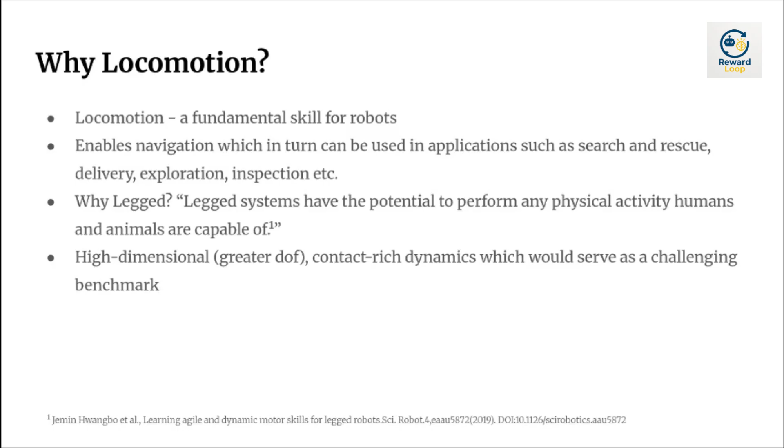One reason legged robots became famous is that they gave us an opportunity to explore and exploit applications where it is hard for tracked or wheeled mobile robots to go, similar to what we as humans and animals are capable of. Another reason is that the control of legged robots is much harder than wheeled robots, because you can reduce the contact dynamics of wheeled mobile robots into a very small number of points, whereas in legged locomotion you always have contact-rich dynamics. So trying to solve this with reinforcement learning also becomes one of the benchmarking tasks for reinforcement learning.

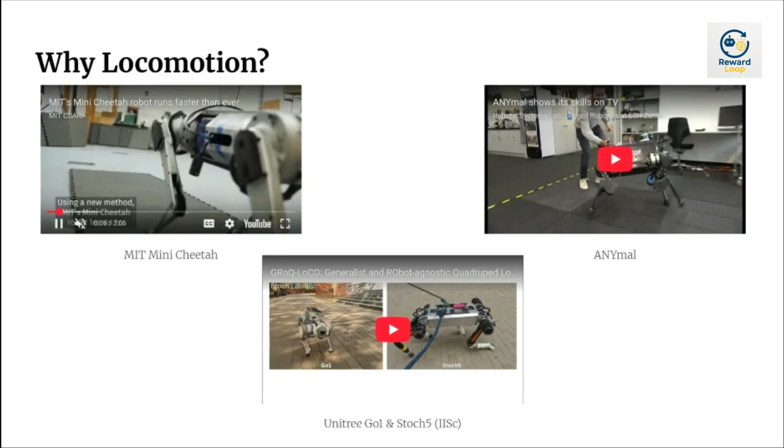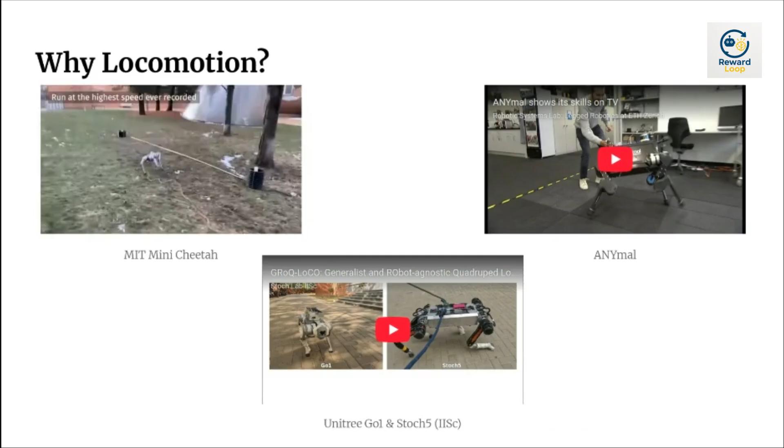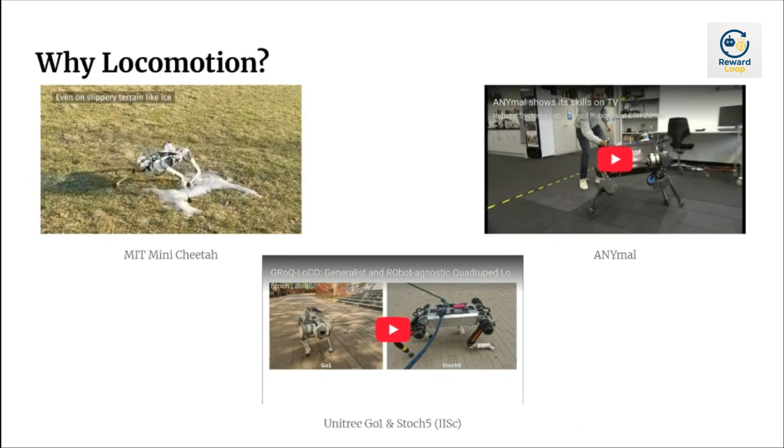I have gathered a few videos of famous legged robot progress. The first is MIT's Mini Cheetah, which everyone would have seen. This was one of the pivotal advancements in the legged robot research space. The video shows a reinforcement learning based training policy which enabled the cheetah to achieve velocities higher than what people were able to achieve with traditional controllers.

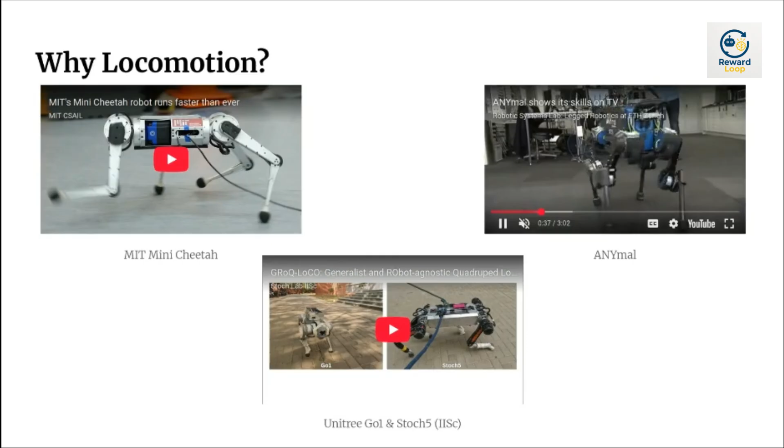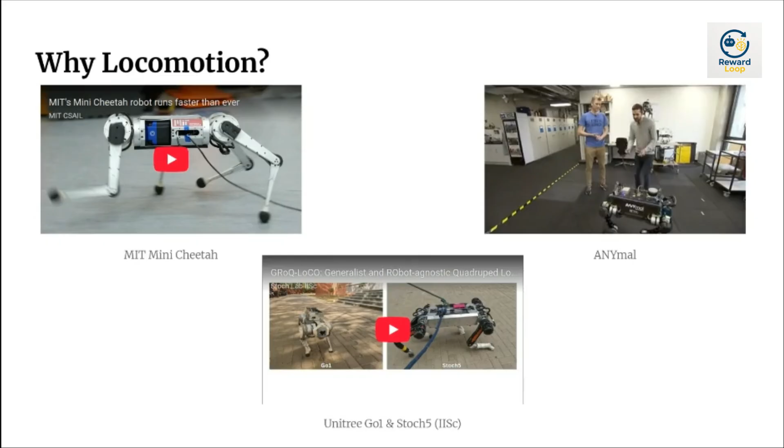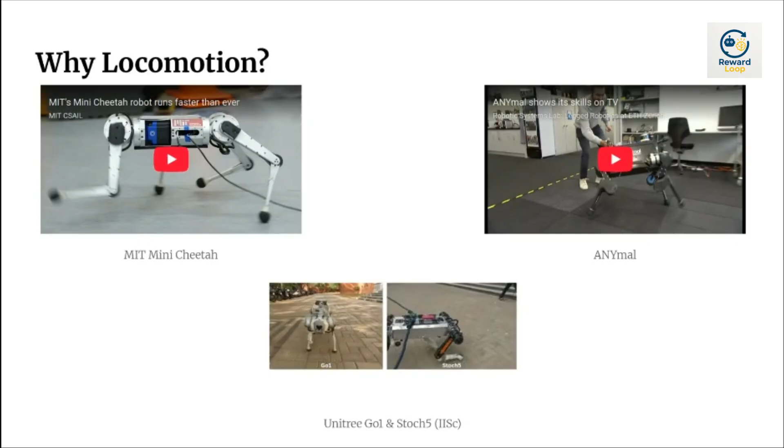The second video is from ETH Zurich, also a reinforcement learning based training policy on their own robot. One thing to observe is that the morphology of the robot is not exactly the same, but reinforcement learning was still good enough to learn it for that particular robot. The third video is from the Indian Institute of Science, Bengaluru — also a locomotion policy trained using reinforcement learning, demonstrated on two different quadrupeds.

Before going to reinforcement learning based approaches, first we have to know how legged robots were controlled earlier, because before going into RL, why do we have to go into RL if classical controls are good enough?

The research of legged robots is believed to have started with the great Professor Marc Raibert, who did a lot of research on legged robots and wrote a book called Legged Robots That Balance. He did research on the Hopper robot and tried to come up with template dynamics using the SLIP model and classic control theories.

Even though these classic control methods proved to be very good back in those days, the major issue was these were all hand designed and hand tuned. Every time you wanted this control to be running, you had to spend a good amount of time tuning the robot to make sure it is good enough to adapt to the current task. And of course, this hand tuning comes at a cost of generalization to new environments or new terrains.

Fundamentally, classic control always had a modular controller design approach. You can boil this down to two elements: the higher level element tries to plan what trajectory should be followed, and the lower level element in the classic control method executes how the trajectory should be followed. So it was basically two controllers trying to match each other's task.

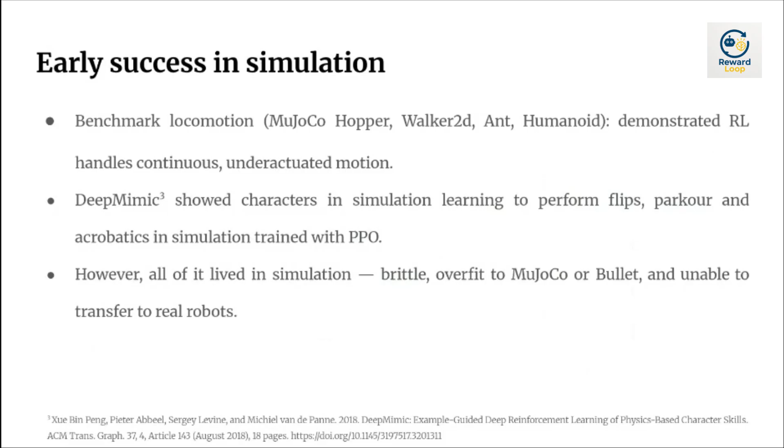And remember, this is only in simulation, we didn't shift to real robots yet. Probably one reason why we couldn't shift to real robots was because people started realizing that the algorithms might be trying to exploit the quirks in the simulation, like shortcuts, which might not be true in the real world.

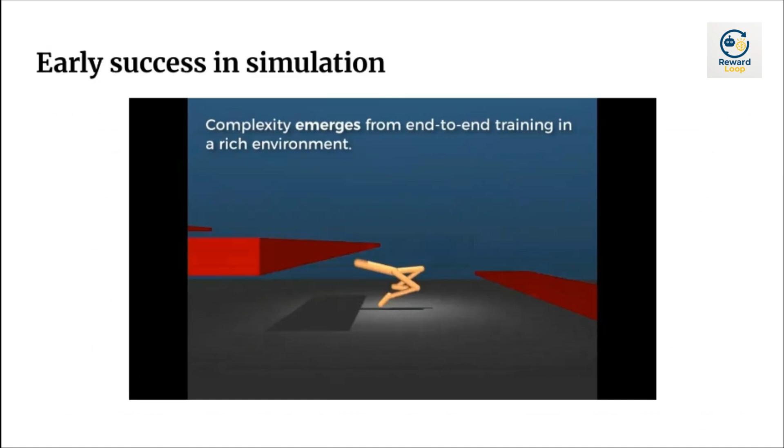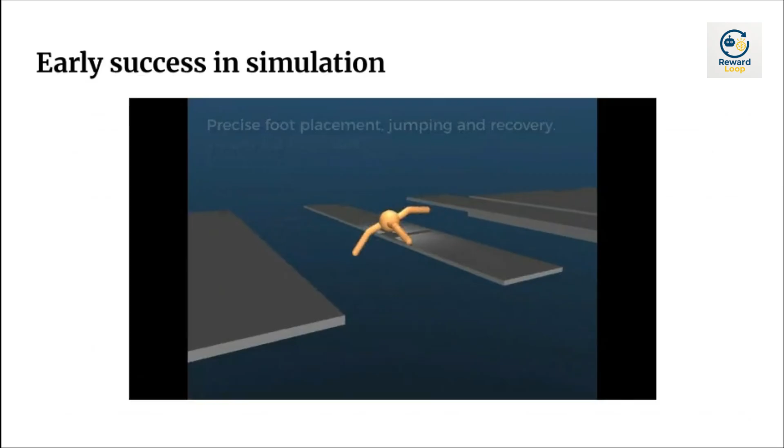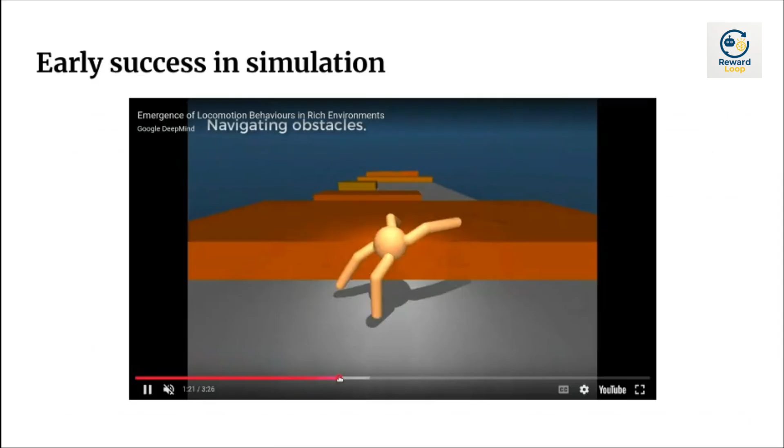This is one of the videos of DeepMind, where they showed that locomotion was successful in a 3D simulation environment. You can see here this is a very basic model of MuJoCo's whole quadruped. Notice that all the demonstrations shown in these videos do not show us any real robot. All these videos are very rough estimates of how humanoids and quadrupeds could be.

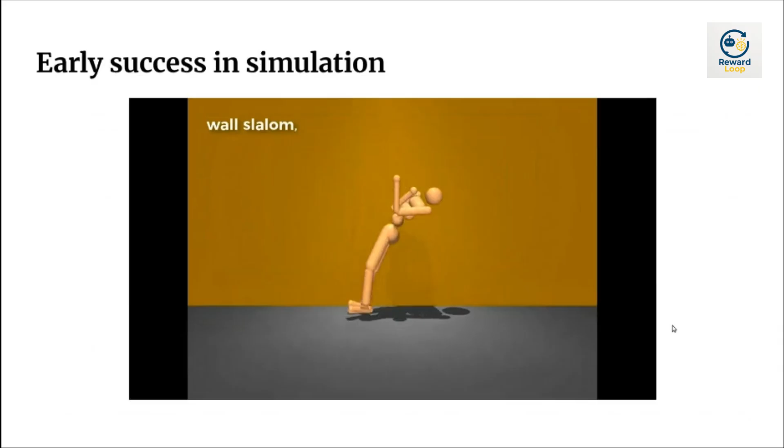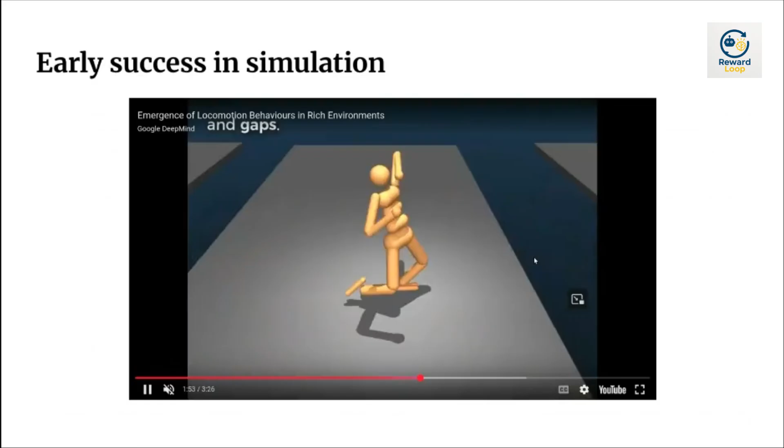And if you see what the policy came up with as walking, it might not seem natural. Hence this itself showed a clear statement that the policies that emerged from the simulation environment did solve the problem, but they were not good enough to be transferred to real life.

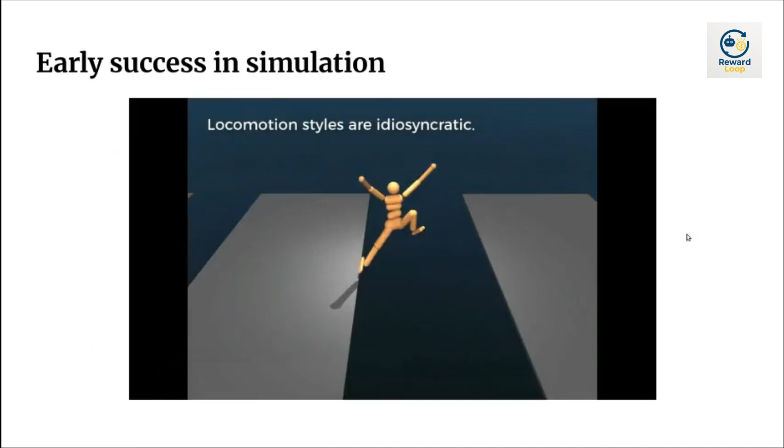So now we'll discuss why there was an issue going from simulation to reality. This is called the sim-to-real gap. This is one of the most famous hurdles for applying RL to locomotion, and to a good extent it still exists. Sim-to-real is basically the mismatch between what you see in your simulator and what you see in your lab.

So you train your policy in a simulator, showing the same state and getting some actions. And if you try to implement the same policy on physical hardware, you would see, as there are videos I'll show later, that a direct transfer of a sim-trained policy or raw recipe would fail on the real robot. So why does this happen?

Why do we get success in simulation but not in the real world? One of the main reasons is that back then, even now to some extent, all the physics engines we have do not represent real world dynamics. They simplify friction, they simplify impacts, they do not model actuator dynamics. It's hard for the simulator to contain backlash and all those problems we face in actuators. Hence whatever action happens in the simulator is close to an imaginary world's dynamics.

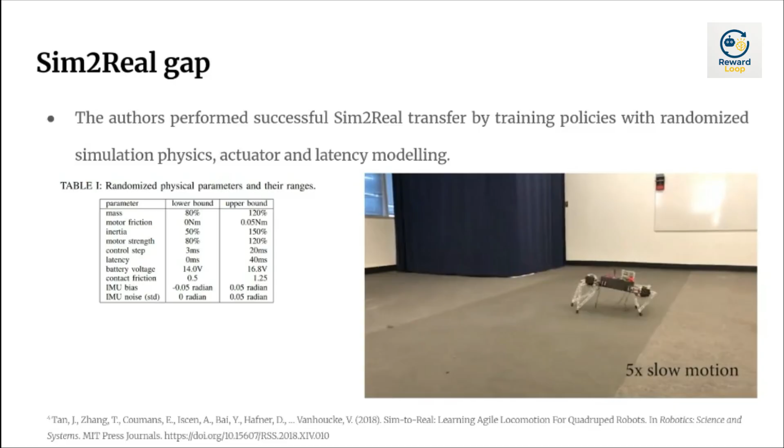Here you can see that with a little bit of improvement in the simulator, not in the physics engine, but in the parameters using which the physics engine would calculate dynamics, they were able to show that they could pretty much approximate what the real world dynamics could be, not would be, could be, with such techniques.

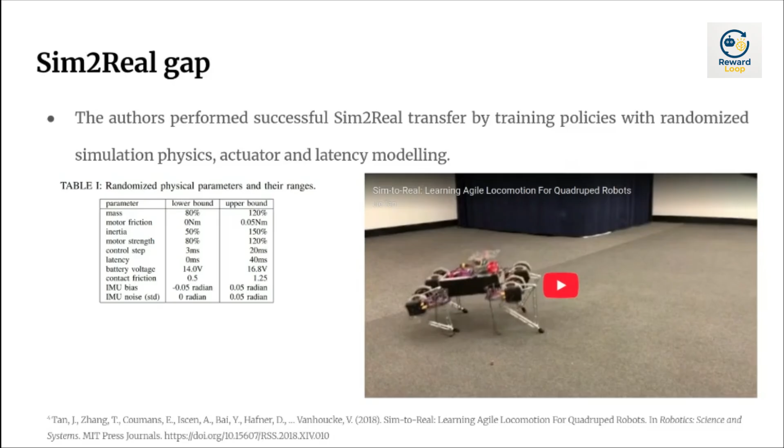And after domain randomization came a lot of techniques which gave us robust real world locomotion. There are many techniques, and I'll mention three of the most famous ones used till today: privileged learning, massive parallel simulation, and hybrid approaches.

So first, let's talk about massive parallel simulation. This is something we can all understand and relate to very easily. With the emergence of good GPUs and good GPU-based simulators like NVIDIA's Isaac Gym and Isaac Sim...

researchers found that you can run thousands of environments in parallel, making sure that the policies can now explore more at the same time. Things that used to take days to train can now actually be achieved in minutes, which will make the learning and iterations much faster.

So this massively parallel simulation gave us a very good roadmap on how fast and easily we could learn to come up with good policies, so that we have greater time focusing on solving the task rather than waiting to see if the task can be solved with the hardware we have.

And the second most famous method is privileged learning. Privileged learning derives its idea from knowledge distillation in deep learning. To keep it simple, privileged learning is where you make sure the simulation is different from the real world. What I mean is that the policy you train in simulation will learn from every single piece of data available in the simulation: terrain information, joint positions, joint velocities, which are also available in real life. But things like terrain information are not easy to get directly in real life. Hence, in simulation you would learn a policy, and that will serve as your teacher policy.

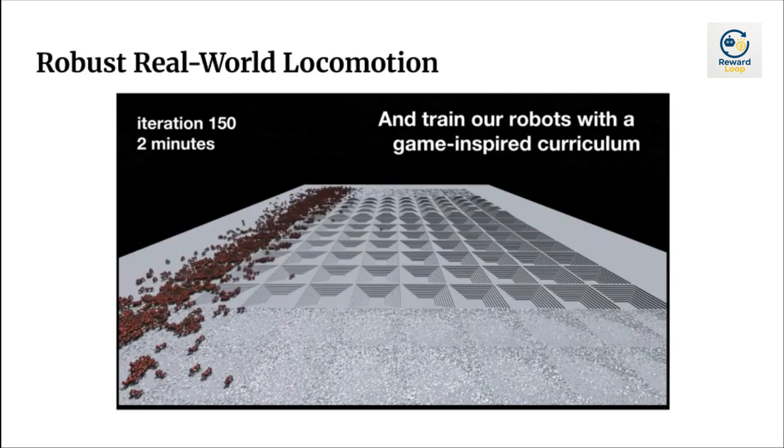This is a video of massively parallel deep RL, which we discussed in terms of exploiting GPUs. The authors showed that with massively parallel simulations in good GPU simulators like Isaac Gym, you could learn to walk in minutes when you have enough randomizations and terrain complexities. This is very important because it reduces your iteration time and training time, making tasks which are achievable much more practical.

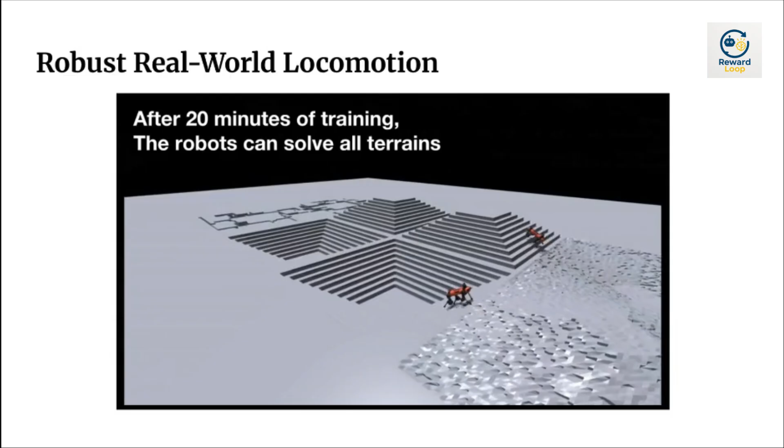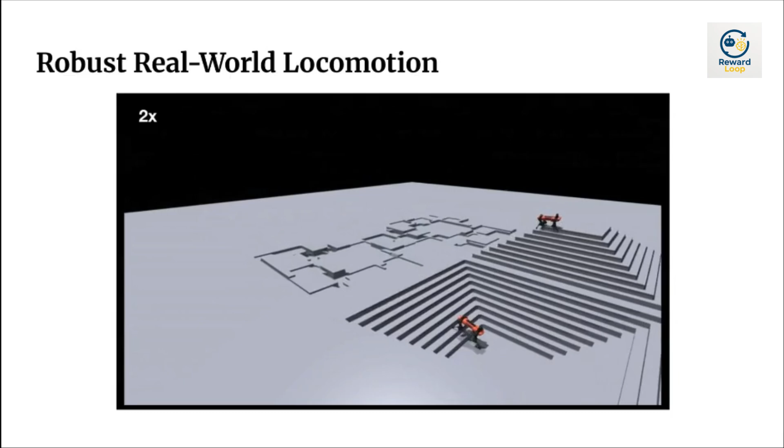It also gives opportunities to explore rapidly adapting policies or scale experiments that wouldn't be feasible without exploiting GPU capabilities. So this was one key enabler for recent advancements, and what we could see here is a really robust policy helping the ANYmal quadruped navigate the terrain.

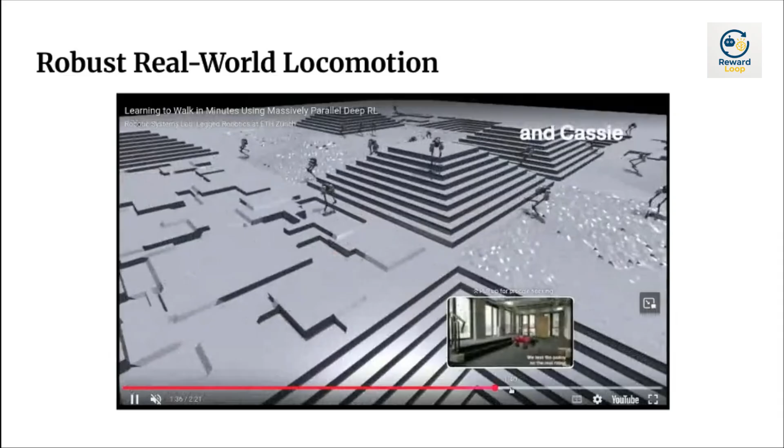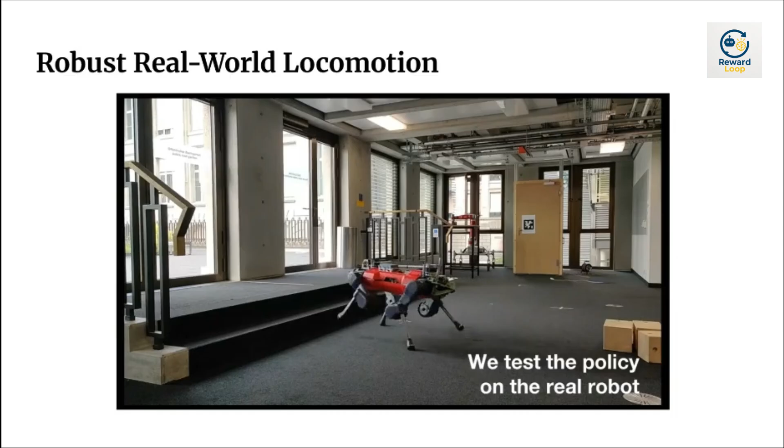And this was not only constrained to four-legged locomotion, they have also shown Cassie, the biped robot, training in the simulation world, and this was later deployed into the real robot and tested.

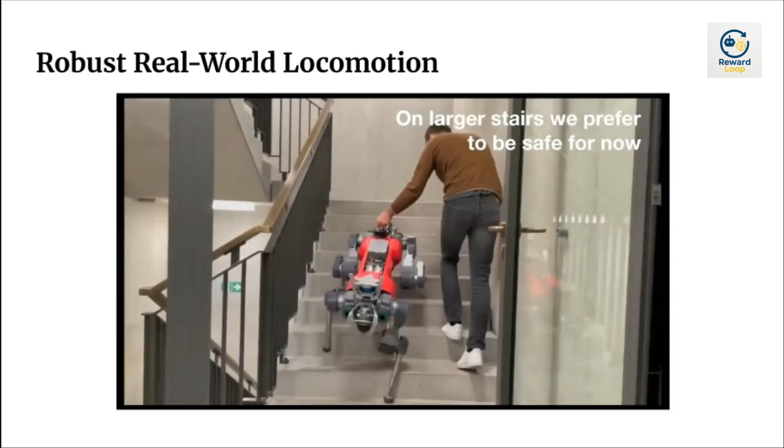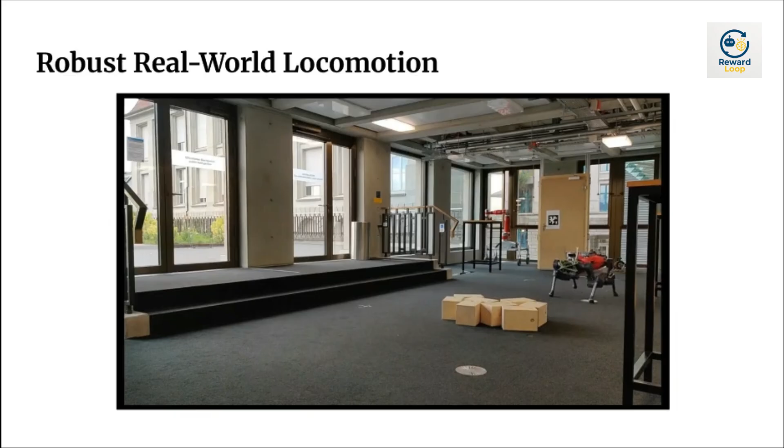And we could see that it's fairly pretty good. Most of the policies that you see in these videos are not exteroceptive, which means it's not that all of these policies exploit your vision data or LiDAR data. Some of these policies are even proprioceptive, relying only on intrinsic variables like torque, position, velocity, IMU data—things that don't require an external sensor.

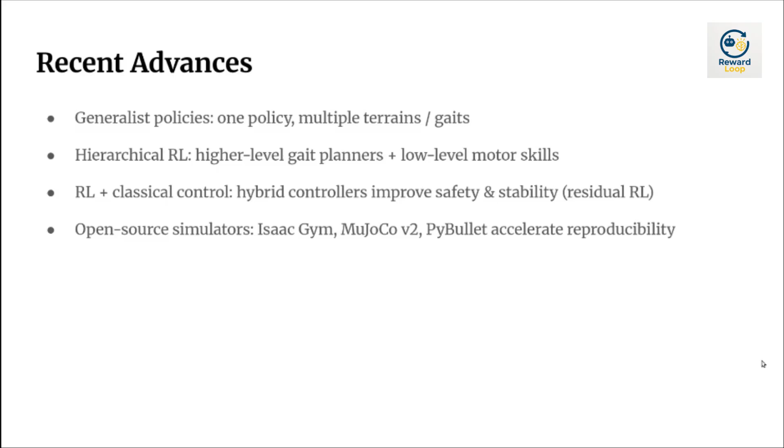Talking about recent advancements, one of the most important research papers in this field, Rapid Motor Adaptation, paved the way of asking: what if instead of just randomizing everything in the simulator, what if we just let the robot run in the real world and let it adapt, like how a baby learns?

Like we as humans, we fall when we learn to cycle, and then we learn how not to fall. We don't learn how to cycle, we mostly learn how not to fall off the cycle. So this was the basic idea behind RMA, where they tried to come up with an architecture which would learn to infer the dynamics on the go and then adapt to it, rather than trying to show every single possible case study in the simulator.

So this has two components. One is the base policy, the policy which we train for it to walk, and another called the adaptation module, which would try to estimate the current state and match it with available data, so that even when there is a change in terrain not exposed to the robot earlier in the simulator, it would be able to fairly exploit the existing knowledge and take necessary actions. The combination of these components enables the robot to adapt to novel situations.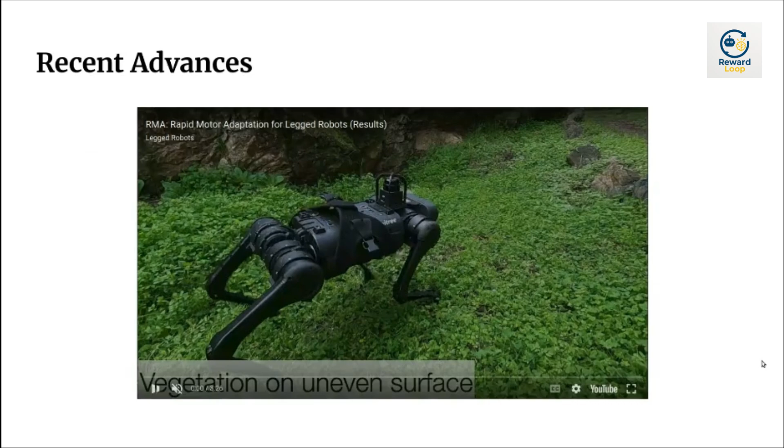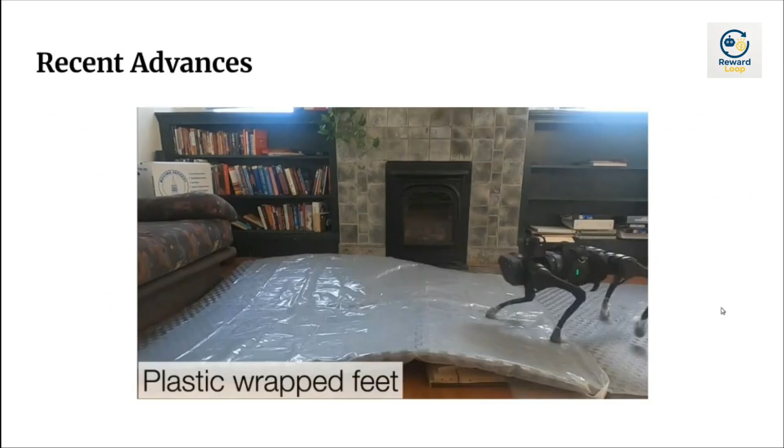So this is a video of RMA, and I've shown one particular result of this experiment, which is walking on an oil-covered plastic sheet. The authors claim that they did not show this case to the robot in the environment, but you could see that the robot was fairly good enough in a lot of varying terrains.

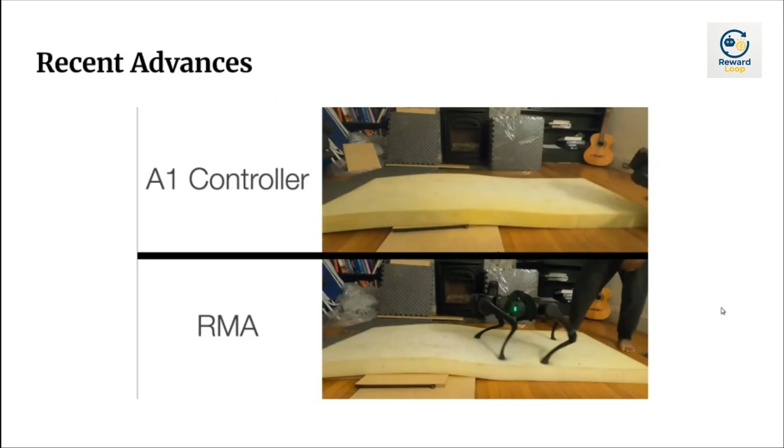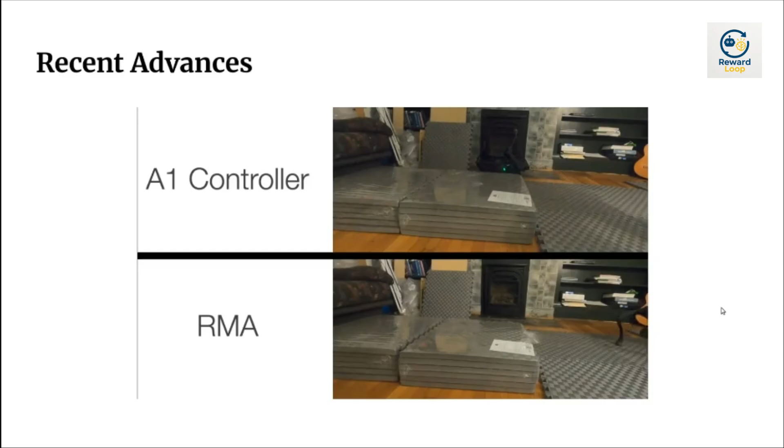Here you could see different terrains with different friction values, different heights, and still you could see that the robot does not struggle and is fairly good enough with the estimates.

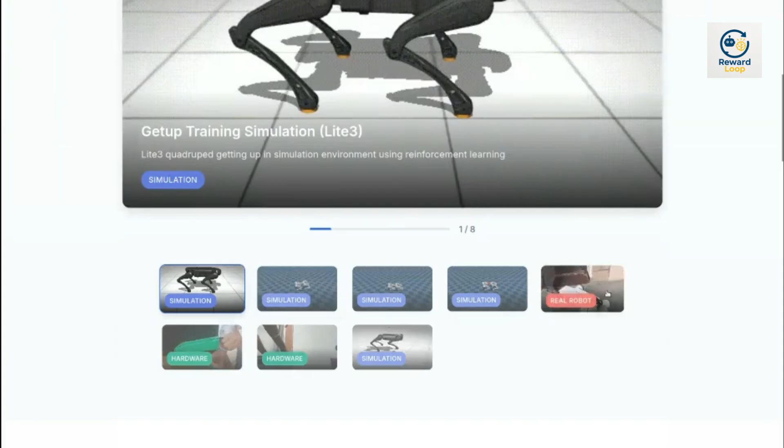So this is our website where we keep on updating the resources as we go. And we do have a Deep Robotics Lite 3 robot in the lab. We are planning to implement all these state of the art policies and test and research how good it would be to come up with a one-off policy.

And these are our simulation environments. So we work with MuJoCo as a simulator. We are using MuJoCo Playground, an open source framework by Google DeepMind for training our policies. And we are yet to do sim to real, we haven't performed sim to real yet.

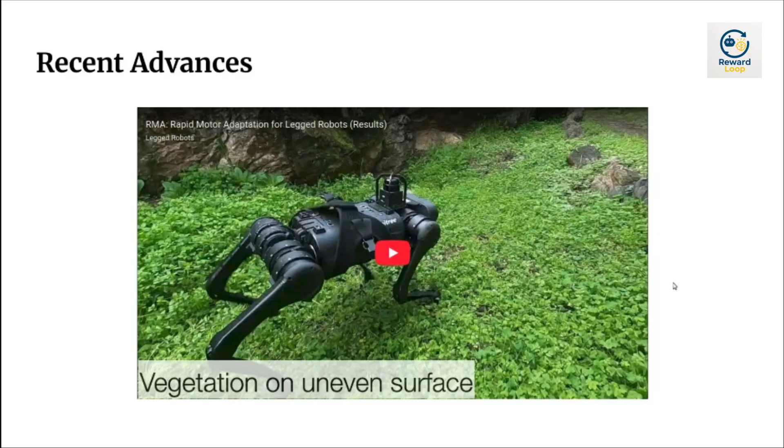So one fair reason is that this does not use exteroceptive data. Basically, to find that there is a very large amount of oil pool in one area, you of course need something like camera data to avoid it at first. When you are using data from proprioceptive sensors, and you find that you enter into a region of, let's say, a large amount of oil, you can still see that the robot's leg is fair enough to tackle the section. It doesn't avoid it, but it makes sure to go into places where it won't slip off.

The main objective of this RMA was not to avoid such scenarios, it was to adapt to such scenarios. Even though you are exposed to a place where you have such things, how would you balance the robot, how will it learn to balance itself? Maybe integrating exteroceptive data like camera data, trying to identify that the density of oil at this region is larger, would add on to the policy to make sure it doesn't end up falling there. Probably it will fail in that region, so it will try to avoid it, but with proprioceptive data it is hard to estimate that beforehand. So that is the reason why RMA probably doesn't do that.

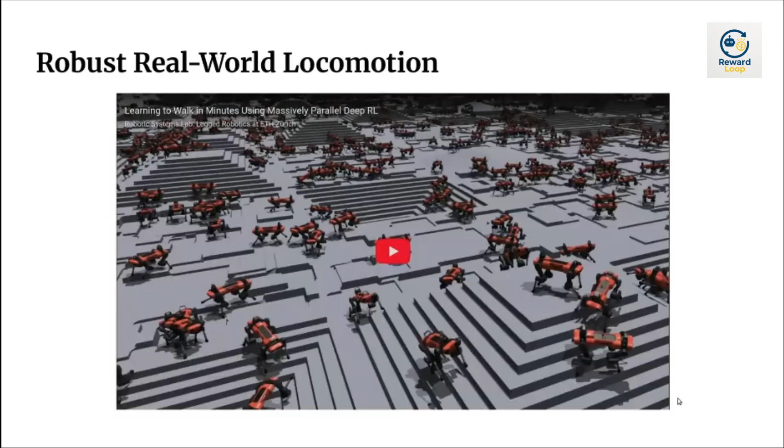In privileged learning, what you do is in the simulation you show the policy states which you cannot extract from real life too. So it's basically giving it extra information about every possible data available for it to extract, which might not be available in real life.

So you train this policy in simulation, and this is on one side. Then in the real robot, the student policy would be trained with the observations available to the robot in the real world. Some major examples are terrain geometries, because it's hard to get accurate terrain geometry data in a real life robot. So you would have a prediction of action for the student policy and a prediction of action for the teacher policy, and you would try to minimize this loss.

This knowledge distillation method is what you do in privileged learning. This is one way of privileged learning, and the other is the latent variable approach, where you try to reduce this higher dimensional data into lower dimensional data, and you also have an estimator in the real robot which predicts a lower dimensional value, and you try to regress these values, giving a fair, approximate, accurate action that could be taken.